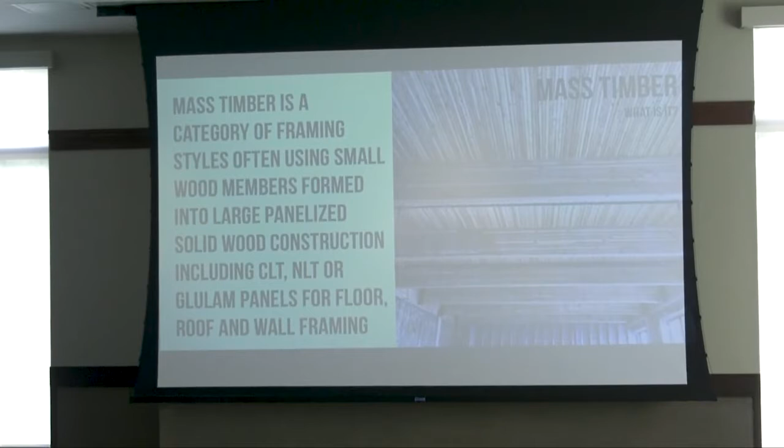They had solid timber columns that are maybe 10 by 10, 8 by 8, but those were cut from one single log. What mass timber construction does is allow us to create those similar sized large cross sections of wood, but instead of being cut from one log, it could be 8 individual 2 by 10s glued together or something like that. That's historically where timber construction has been.

Now, unless it's a specialized timber frame, where wood construction has moved into is this realm of light frame wood construction. That could be everything from single family homes up to 4 or 5 story apartment buildings, hotels, etc. What mass timber construction has allowed the construction industry to do is really bridge the gap between those two.

Now we can go back to the historic post and beam style construction, still using wood, but using mass timber. So it's panelized systems like this, where these are glue laminated timber beams that you see here. On top of that is a nail laminated timber floor deck, creating solid timber sections, panels, slabs essentially, that are completely timber construction.

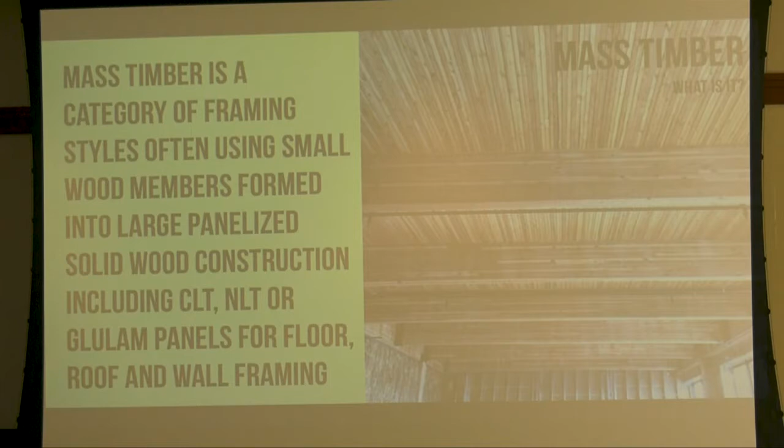I'm just going to go into an introduction of the 4 common styles of framing a mass timber building, and then we'll look at the specific products that go into that. The first, by far the most common style of modern mass timber framing, is post and beam style construction. This is a great example of that.

This is called the T3 building. It's in Minneapolis, Minnesota, a 7-story office building, spec office space. Amazon has office space in this building. It's 1 story of concrete and then 6 stories of timber construction, like you see this style of framing here - glue laminated timber columns, glue laminated timber beams, and on top of that a nail laminated timber deck, which I'll explain in just a second.

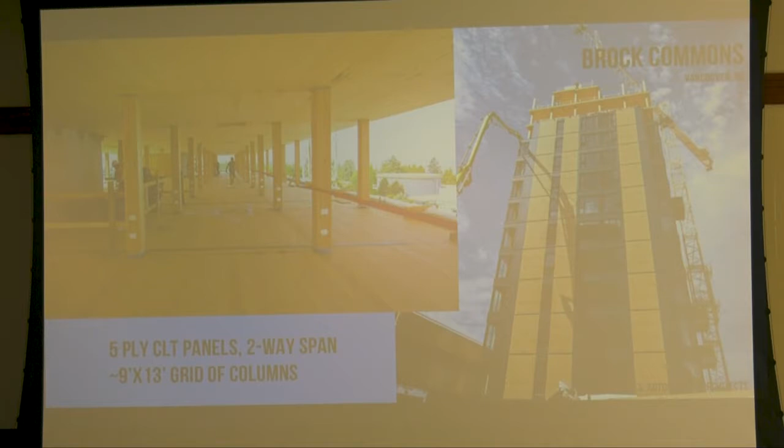The second option, certainly less common, but we're seeing much more interest in this style, is what's called two-way panel systems, or two-way span systems. This style is sometimes used in concrete construction, and the idea is that if you look down this aisle of columns, there's no beams - not a single beam on this entire project. All of these timber slabs or floor systems are point supported just at the column locations, so that timber floor is spanning in both directions, as opposed to the previous system where there was beam, beam, beam, and the slab was just spanning one direction from one beam to the next.

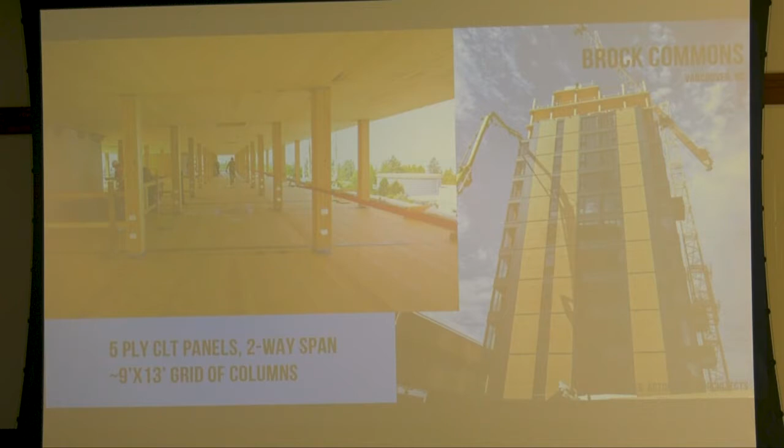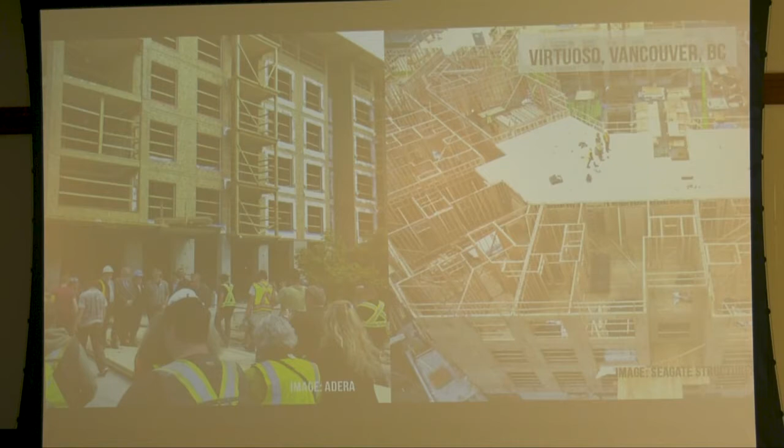The third option is really a hybrid approach mixing light frame wood construction and mass timber construction. This is a project up in British Columbia that from the outside looks like a traditional 4 or 5 story light frame apartment building. But what they've done here is keep those 2 by 6 vertical stud walls, while instead of a floor and roof system that's trusses or I-joists, they're using cross-laminated timber floor panels. So they get the aesthetic from below, exposing that timber panel, plus the benefit of speed of construction that cross-laminated timber allows, but the vertical systems are just as you'd see in any other light frame wood project.

The fourth style of framing, sometimes referred to as the honeycomb style, is basically mass timber bearing walls and mass timber horizontal surfaces. This is a 4-story hotel in Alabama, and it's all cross-laminated timber construction.

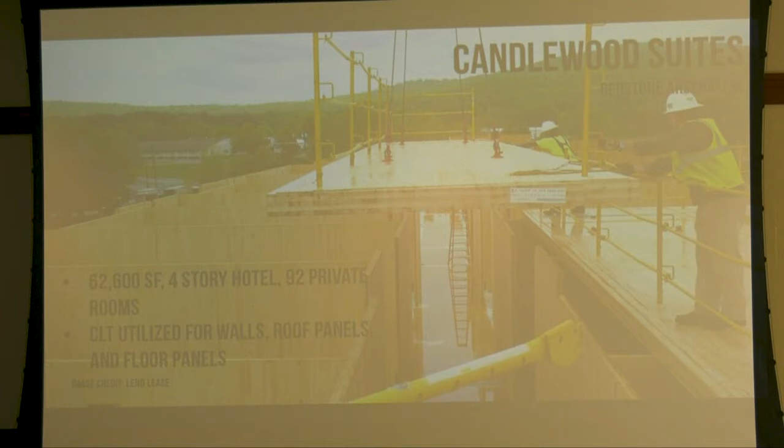So you can see this is looking down the corridor of what will eventually be this hotel. Bearing walls separate each of these individual hotel rooms, and they're lowering this section of cross-laminated timber floor panel that will be the walking surface over this corridor.

So that's the snapshot of the four styles or four ways that you can frame the skeleton of a mass timber building.

So what are the actual products that go into that building? The first one, I've alluded to this a few times, glue laminated timber, often called glulam. It's a product that's been used in construction for almost 100 years here in the U.S., very common especially in timber bridges, but it's seeing more of a renaissance as this mass timber revolution occurs in the U.S.

Simplistically, it's using mostly just 2x commodity lumber, and you place one on top of the next flatwise, a screen of adhesive between each. The entire section is pressed together and planed. So you end up with this solid cross-section of wood that could be 8 inches wide, 2 feet deep, but it's made up of a number of small individual laminations of wood.

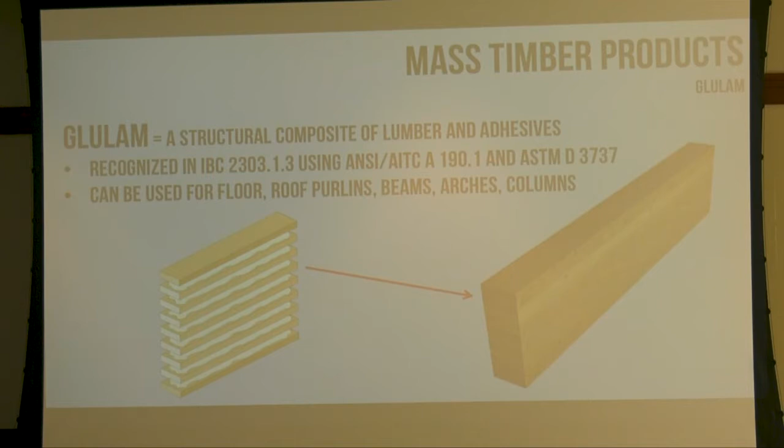One of the benefits is that you can vary the strengths of the laminations of wood based on where the structural stresses are highest. So if you think about a beam that's in bending, the top is in compression, the bottom's in tension, so you can place your higher strength laminations there and use lower grade lumber in between. You're really optimizing, whereas a solid 10 by 14 beam has the same strength properties throughout.

This style of post and beam construction with glue lam, oftentimes we're looking at projects like this, but I wanted to highlight that there is capability to use glue lam in much larger, flexible shape sizes of buildings.

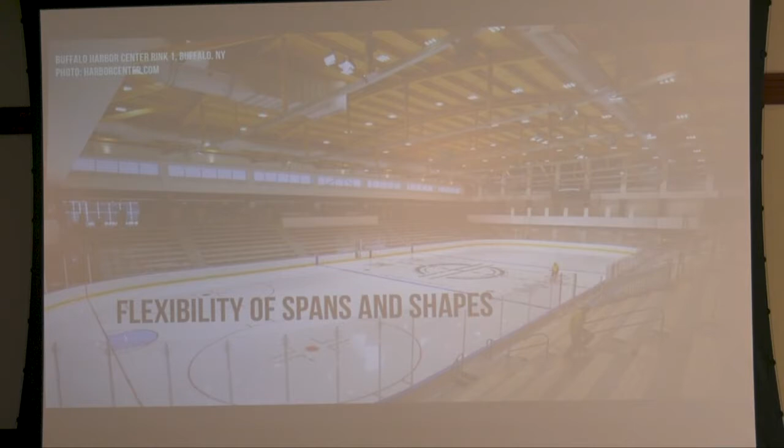And then the actual products that go into the horizontal surfaces. If we've thought of creating the structural skeleton of a building with beams and columns, now we need the horizontal surfaces, the floor surface and the roof surface. You can see there's a pretty wide variety of products that we can use to frame those systems.

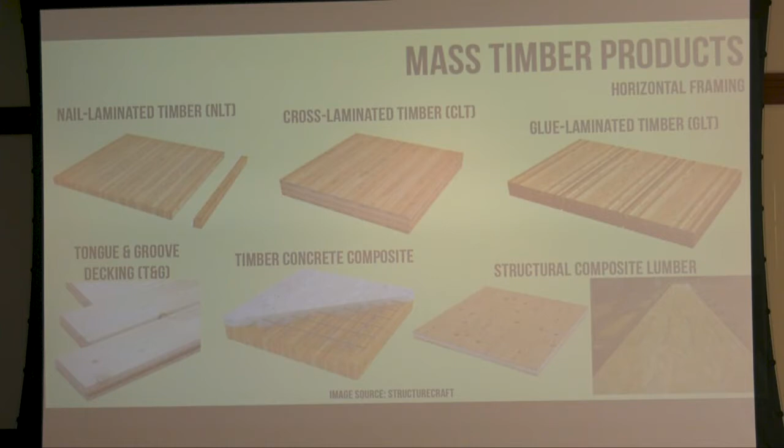We're going to focus mostly on the top three, those are the most common. I do have samples of cross-laminated timber and nail-laminated timber on the back table too. I meant to bring them up and pass them around, but feel free to put your hands on them and see what they feel like.

So the first one, nail-laminated timber. Again, you can see the common theme here, most of these products are made up of a number of individual smaller commodity lumber products. This is simply taking 2x lumber, 2x4, 2x6, 2x8, each oriented on edge, and then nailing one lamination to the adjacent lamination to form a solid timber panel.

Usually this is fabricated off-site, so you might have an off-site warehouse or fabrication facility, and a contractor or framer would be fabricating panels maybe 8 feet wide, 20 to 40 feet long, and those panels are erected on site. You can think of that as similar to precast concrete construction, where they're casting slabs off site and bringing them to erect, very similar with nail laminated timber.

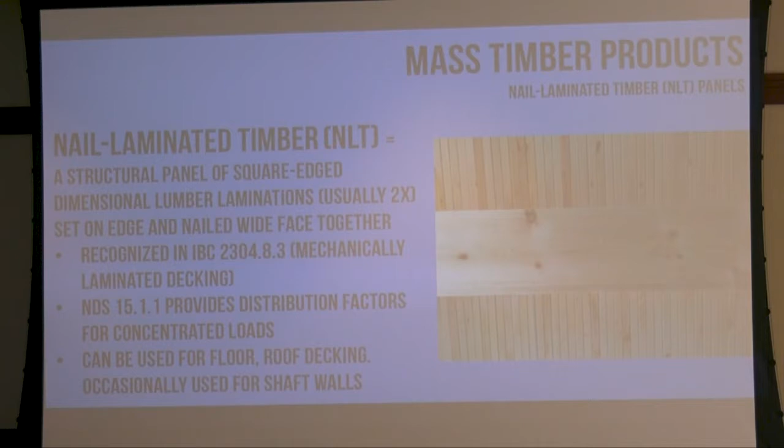Also, if anybody is doing any type of mass timber building design, there's a copy of this on the back table, feel free to grab it. It's a great resource, the nail laminated timber design and construction guide. You can also download this free on the web.

Just one example of a modern timber project that has used nail laminated timber, this is the Bullitt Center. It's a custom office building in Seattle, Washington, completed about 6 years ago. You can see looking down this open office space, a really beautiful structure, glue laminated timber columns and beams, and nail laminated timber for the floor surface and roof surface.

That's exposed from below, but it's usually not exposed from above. Typically on top of this surface you'll have some type of acoustical mat, because acoustics is a concern in these types of structures. Oftentimes you're pouring either a thin concrete topping layer or using a combination of other materials on top, which your floor finish is installed on, and those also help with acoustics. So the underside can be exposed, but the top is typically not.

Dowel laminated timber is very similar to nail laminated timber in terms of how it looks and goes together. The difference is that rather than using nails to attach one lamination to the next, we're using hardwood dowels, where you're drilling through the entire panel and inserting these hardwood dowels through to tie that panel together.

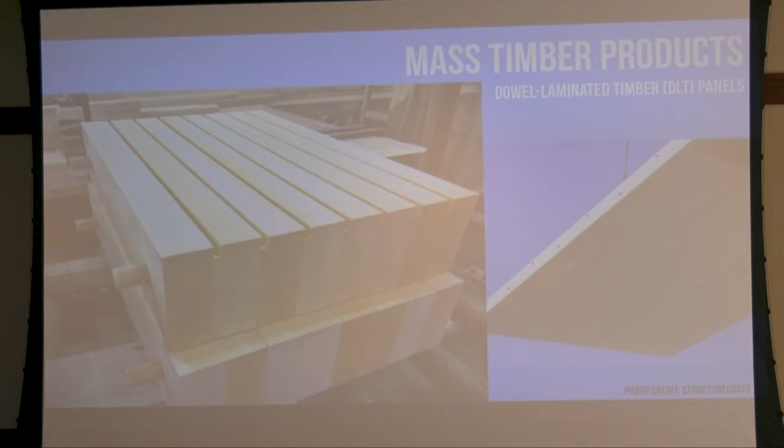And then glue laminated timber. We talked about glue lam in terms of a beam and column application, but some people are actually using this to form solid timber panel surfaces, where you're fabricating, usually 2-foot deep glue lams, but then you just lay them on their side and lay multiples of those beams side by side.

And then more of the traditional heavy timber construction is using tongue and groove decking. Everybody's probably familiar with this, 2x, 3x, or 4x are the most common.

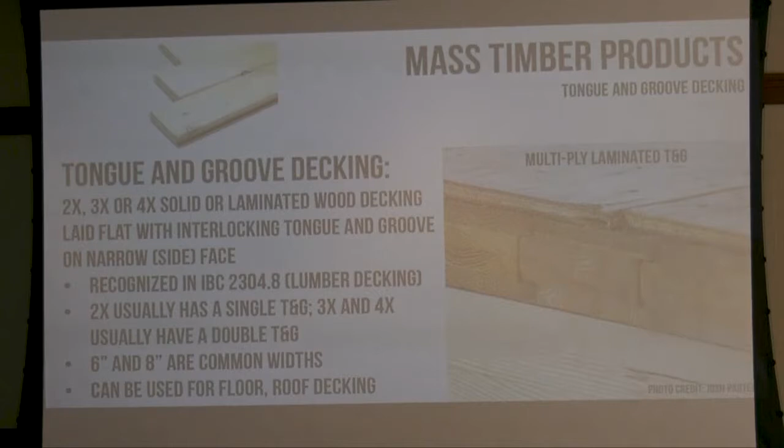One example of a very recent project here in the Northeast that used this approach is the Patrons Oxford Insurance Building, this insurance company's headquarters in Portland, Maine. This was completed just about a year ago. It's a two-story structure, about 20,000 square feet, and they used exposed timber, glue lam beams and columns, and then a tongue and groove decking system on top of that.

And then probably what some people consider the rock star of the modern mass timber movement is cross-laminated timber. So what is cross-laminated timber? It's a solid panelized timber system, and again, it's made up typically of 2x commodity lumber products.

But the difference between this and nail lam or dowel lam is that instead of each lamination being oriented vertically, each lamination is flat. So you basically lay one lamination side by side to the next. Maybe you have an 8-foot wide strip of 2x's, screen adhesive over that entire surface, and then another lamination of 2x's goes on top, but 90 degrees perpendicular to that previous layer. You keep doing that, alternating directions. You generally have an odd number of plies so that the two face plies are going the same direction.

It's very similar to how plywood is made, you have that same style of alternating directions. People have referred to CLT as plywood on steroids, right? Instead of a half-inch thick panel that's 4 feet by 8 feet, you have a 7-inch thick panel that's 8 feet by 60 feet. So those are the dimensional differences we're talking about.

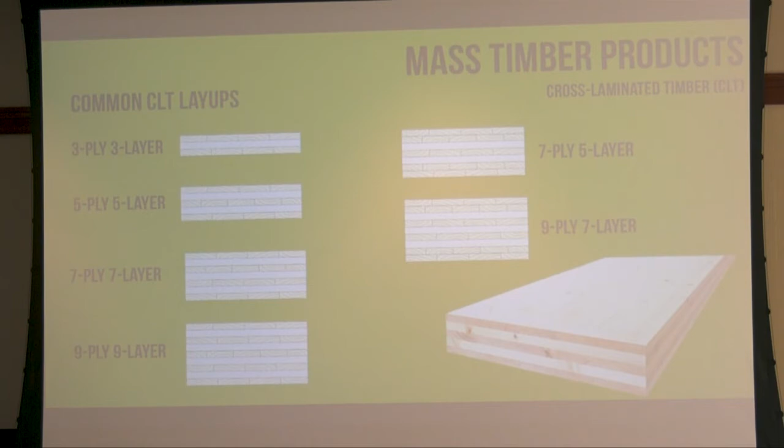So just to look at the end or cross section of a panel of CLT, this is what we're talking about. Just to give you some idea of scale, a 3-ply panel is about 4 1/8 inches thick, a 5-ply panel is about 6 7/8 inches thick, and a 7-ply panel is about 9 5/8 inches thick. Those are the three most common thicknesses in North America. Once you get above that, cost starts to become an issue.

One of the differences in terms of how we think about timber construction and modern mass timber construction is that it's a completely prefabricated style of framing. You're not going to your local lumber yard, purchasing a stockpile of CLT panels, having them delivered to the site, and then cutting each one to size. You're figuring out where on the project each panel goes.

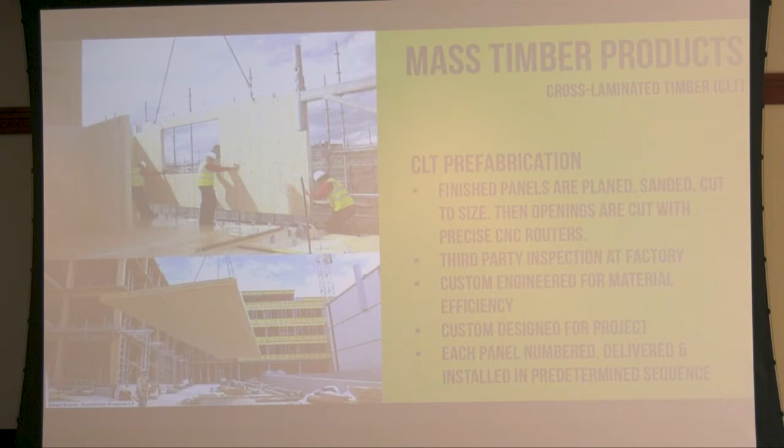This is completely done through a shop drawing process, generally speaking a 3D building model process, where every panel, every product is for a specific location, cut to size, even things like notches, holes, window and door openings. Everything is done prior to getting to the job site. Even how these panels are loaded sequentially on the truck is thought out ahead of time, so that when that truck arrives, it's pick and place, right?

You're not having to create a separate material stockpile on site. So it's a very quick installation process because of this pre-planning work that goes into it.

Just an example of a project, we saw this one previously. This is the 4-story hotel on a military base called Redstone Arsenal. Just as a point of local interest, this developer called Lend-Lease has since constructed a second one of these 4-story CLT hotels at Fort Drum in upstate New York. So we're starting to see more of these locally.

One of the interesting stories with this project is that this developer has a contract with the Army to develop over 50 of these hotels. They've traditionally always built them on military bases, and they've traditionally always built them with light gauge steel stud framing.

That first project, this one you see here, this company does international work, and they had used CLT in some of their international projects. They decided to give it a try in the U.S., and what they found was that because of the speed of construction, they were able to frame this about 30% faster than their traditional light gauge steel projects, using almost half the number of people on site to frame it.

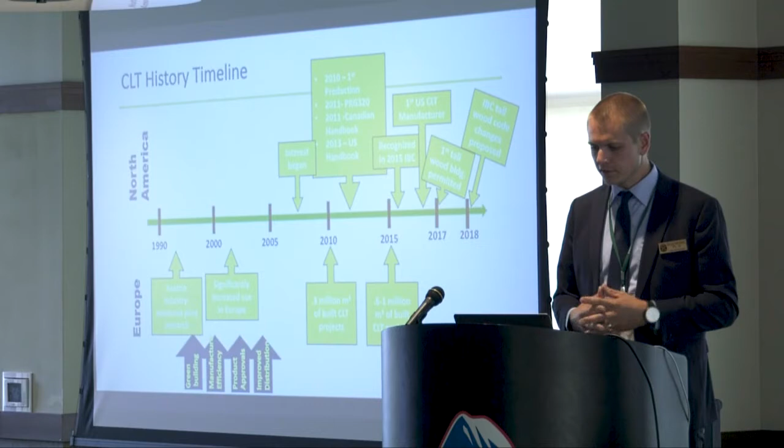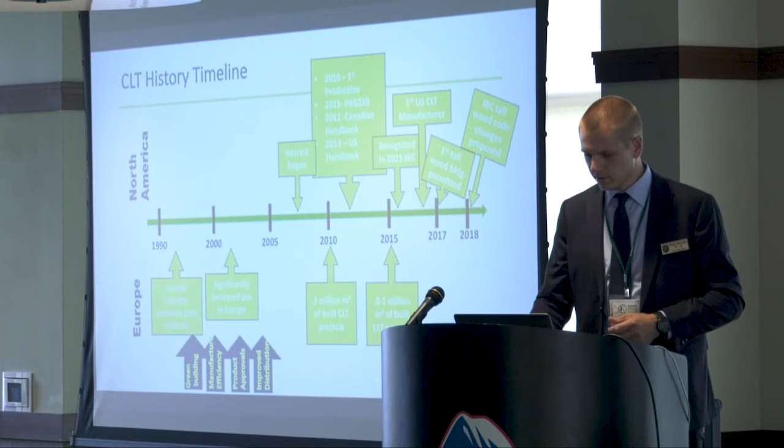We'll get into this at the very end here in just a couple minutes when we start looking at the next step. There's more interest in tall wood buildings, and the code is continually evolving to recognize that. The International Building Code comes out with a new version every 3 years. Right now the most current version is the 2018, but the changes for the 2021 Building Code are already in process. So I did mention the significance of CLT being in the 2015 Building Code and all versions since then.

One great resource to point people to is the Cross-Laminated Timber Handbook. This came out in 2013 and was really the first design publication to help people that are interested in designing buildings with cross-laminated timber. You can download this for free on the web as well.

Another question that we get very often is, I'm kind of interested in this mass timber thing, and again, we help engineers and architects all around the country, so is there anybody near me that's producing mass timber, in particular CLT? Glulam suppliers are fairly abundant, spread throughout most of the states. Regionally, the closest, largest one to us is in Unadilla, New York, a company called Unalam.

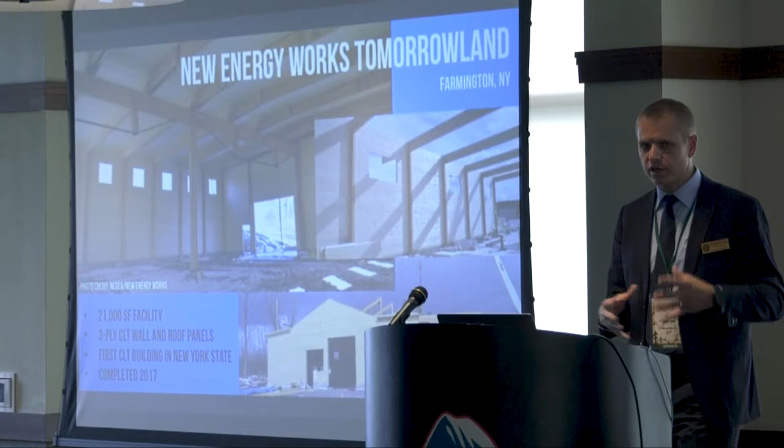In upstate New York, this is the fabrication shop for a timber framing company called New Energy Works. This is the first all-CLT building in the state of New York. It's about 20,000 square feet, and you can see they're using CLT for both the wall panels and the roof panels, and then glulam columns and beams.

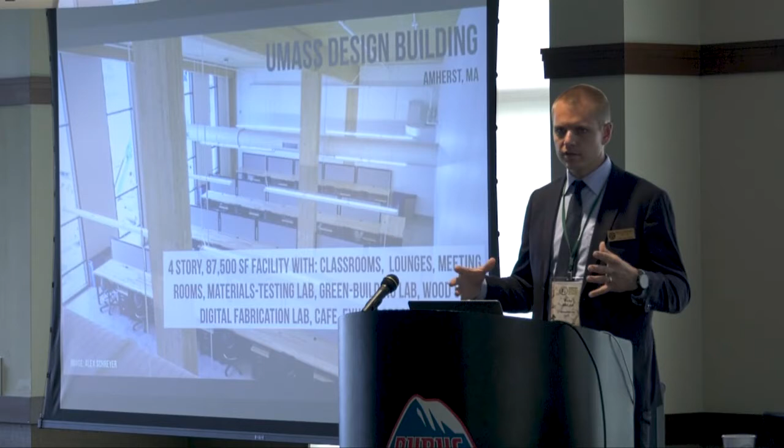And then really the game changer, as far as significance of project size and display of innovative mass timber products, is this 4-story building at the University of Massachusetts Amherst called the Design Building. This opened in early 2017, so it's been open for about 18 months now. It's really a unique and excellent display of the variety of mass timber products and systems that can go into construction.

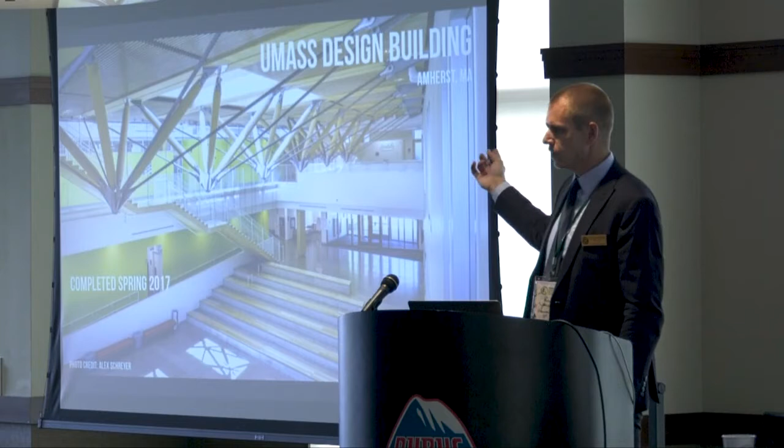There's lab space, classroom space, and also this really beautiful entry courtyard, interior courtyard area. On top of this, you can see there are skylights and actually a green roof area. One of the departments this building houses is landscape architecture, so they're using this building not only as housing for their classroom spaces, but also as a teaching tool by exposing the structure, exposing the mechanical systems, and using that green roof. Just some of the images of that project.

And then here in the state of Vermont, there's an interesting story behind this. This is actually under construction now - it's the new base lodge for Mount Snow in West Dover. I gave a mass timber presentation at an event probably about 18 months ago, and after that, one of the architects who attended contacted me about 2 months afterwards, saying, hey, I've got this new base lodge project I'm working on. It was planned to be all steel construction.

He said he really liked the presentation and was interested in using mass timber. So over the next month or so, I helped him work through a lot of the design questions, construction types, and fire ratings. Ultimately, the roof is now going to be exposed glulam. They didn't end up using CLT - they're actually just using a tongue and groove decking system. But I saw some photographs, and a lot of that timber has been installed, and the project's looking really beautiful. Just a local example of a great use of mass timber construction.

In closing here, over the next few minutes, I wanted to give a glimpse into what we see coming up next with mass timber construction. I'd say the future's looking up - there's a lot of interest in going taller, building taller wood buildings.

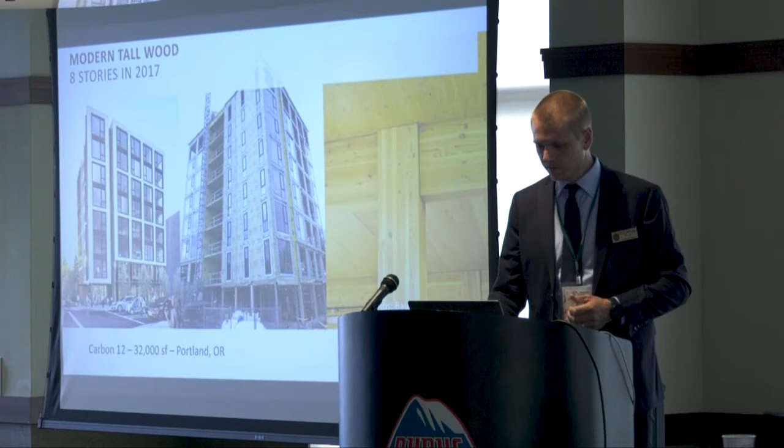And then the big one is the 12-story Framework project, which is scheduled to begin construction hopefully this year. This was the winner of a USDA tall wood building competition in 2015, where they solicited design teams to submit wood designs for buildings taller than 100 feet. This was the winner of that design competition, receiving $1.5 million of funding from the Softwood Lumber Board, USDA, and several other organizations to fund the research and additional design work required to bring a 12-story mass timber building to fruition. This building has received all of its required building permits and is hopefully going to start construction soon.

On the building code side of things, looking at tall mass timber buildings, the code did recognize this trend in interest in taller wood buildings. So in 2015, the International Code Council, the body that writes the International Building Code, started what they called an ad hoc committee on tall wood buildings. They tasked this committee to come up with a set of code change proposals that the committee and voting governors would vote on eventually, to allow taller wood buildings prescriptively in the building code.

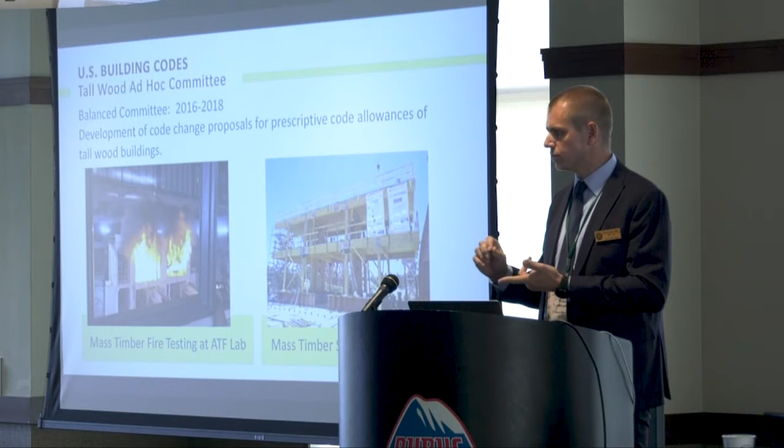Throughout the next 2.5 years or so, this tall wood committee required things like complete compartment fire testing, like you see on the left. This committee was composed of people from the wood industry, but also from steel, concrete, and fire service. Ultimately, the deadline for their submission was January of this year, about 6 months ago. They submitted their proposals to change the building code to allow taller wood buildings.

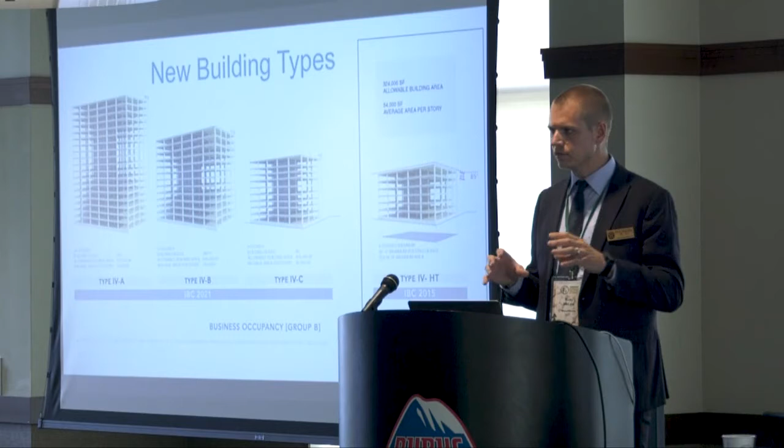The proposal included basically 3 different variations in tall wood buildings, the tallest allowing up to 18 stories of mass timber construction. The next step was in April of this year, about 2 months ago, when the first round of committee hearings took place, and the short story is that there was great support for these tall wood code change proposals.

The committee votes on this. It's a 14-member committee, and they basically vote whether it's recommended for approval or recommended for denial. All 14 submissions were recommended for approval, and with the exception of one, all were recommended unanimously for approval. The one that wasn't unanimous was 13 for and 1 against. So nearly unanimous suggestion for approval by the committee for these tall wood code changes.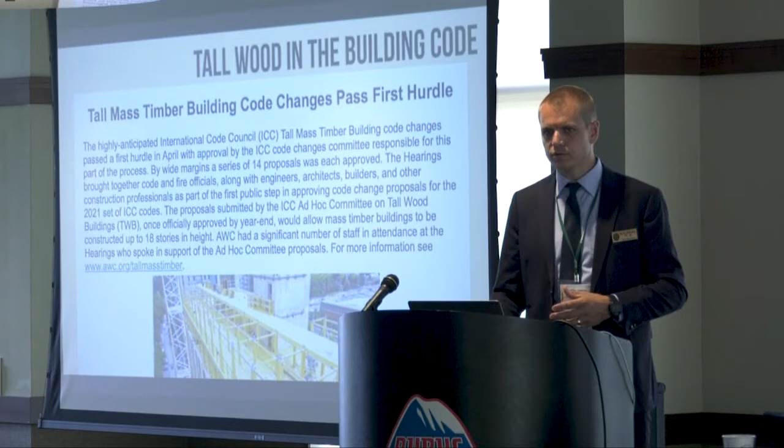The next step is October or November of this year, when the vote actually takes place. These are people with ICC memberships, typically building officials, plan reviewers, and people in governmental positions, who will vote on these code change proposals. If successful in the vote, starting with the 2021 building code, tall wood buildings would be prescriptively allowed, which would be a great step forward for expanded use of mass timber.

And then in closing, what does that mean here in Vermont? I realize Vermont, I live in the state, is not going to see 18-story mass timber buildings, right? So what does that actually mean for the state? Well, I think it can mean a couple of things.

I think there's much concern about, especially the young labor force, and creating interest in jobs more on the technological side of timber construction. As we see more of this modern mass timber construction taking place, there are more jobs around things like computer numeric control machines and creating 3D building models. It's a kind of shift in the technology side of timber construction.

Ultimately, what we're trying to do is grow the labor force and grow a market for continued use of forest products. So some of the statistics here are interesting. Over 700,000 jobs, direct and indirect, currently exist because of the harvesting and manufacturing of softwood lumber products. One of our primary roles is to see that number increase and also see the use of locally harvested forest products increase, and one of those venues could be through the use of mass timber construction in buildings.

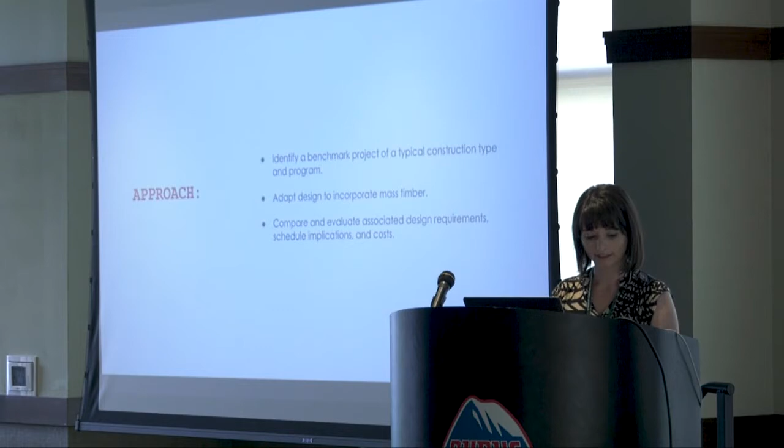Our approach was first to identify what I'm calling a benchmark project, and then to adapt that project to incorporate mass timber, and then to use that to compare and evaluate the design requirements, the schedule, and the cost implications. Our main criteria for choosing the benchmark project was that we wanted it to be something fairly typical for Vermont - a common building type, size, and program - and something where the lessons we learned could be used again and repeated. So we didn't want to choose a project that would be a one-off showcase project.

Once we chose that benchmark project, we reviewed the building codes, the energy concerns, acoustic requirements, structural requirements, and best practices, and then with the help of our advisory committee, adapted our design to mass timber. The goal was to basically change the structure from steel and concrete to mass timber, and then only change other components of the design as necessary to use mass timber, keeping it as close to an apples-to-apples comparison as possible. We didn't change the brick masonry veneer on the outside, and we didn't change the finished floor - only the things that had to do with the structure.

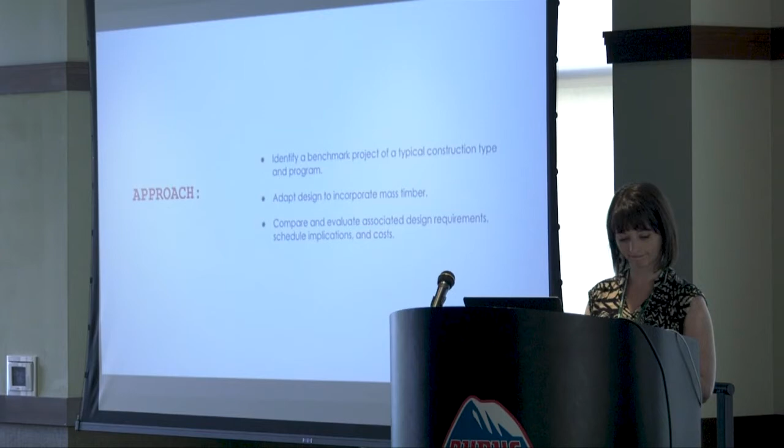And then once we had an understanding of all those requirements, we sent it to a cost estimator, got those results back, and compared them.

We looked at glulam, CLT, NLT, DLT, and tried to choose what was the best system for this project. This is a short description of the benchmark project we chose. It was called 29 Flat Street, which has since been renamed the Snow Block. So if I slip up, it's still in the design process. 29 Flat Street is a project that came to Stevens & Associates about last summer.

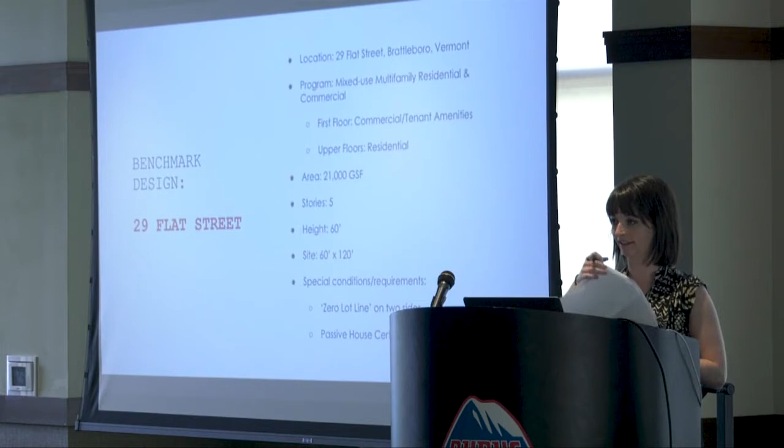We're designing it for the Windham and Windsor Housing Trust, and we completed the conceptual design last fall. That was the set of drawings and the level of design that we were comparing, or that we adapted to the mass timber design.

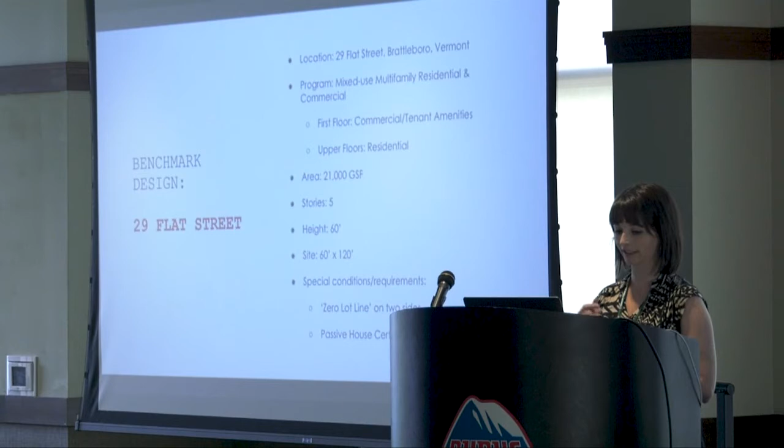The project is located right in downtown Brattleboro. It's a mixed-use, multifamily and commercial building. It's got rental space on the first floor, and then 23 residential apartments above. It's about 60 feet tall, 5 stories, and 21,000 square feet.

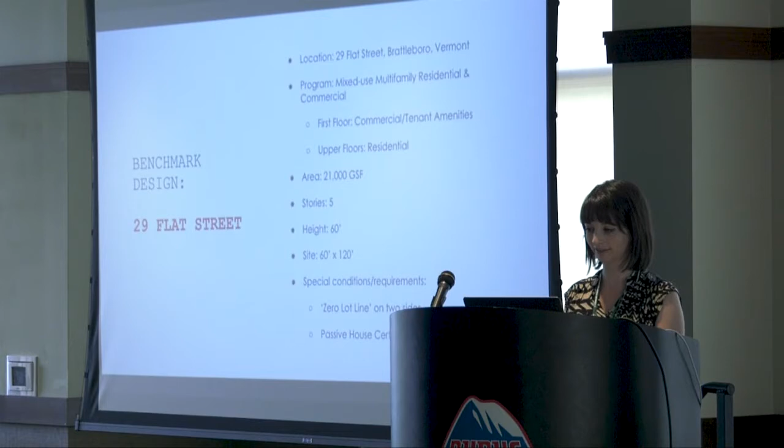The site was a special constraint because it's only 60 feet wide, and our building is 60 feet wide. Because it's downtown, we have what's called a zero lot line condition on both the east and the west. So we're built right up against the building on the east, and there happens to be a vacant lot to the west that you can see here.

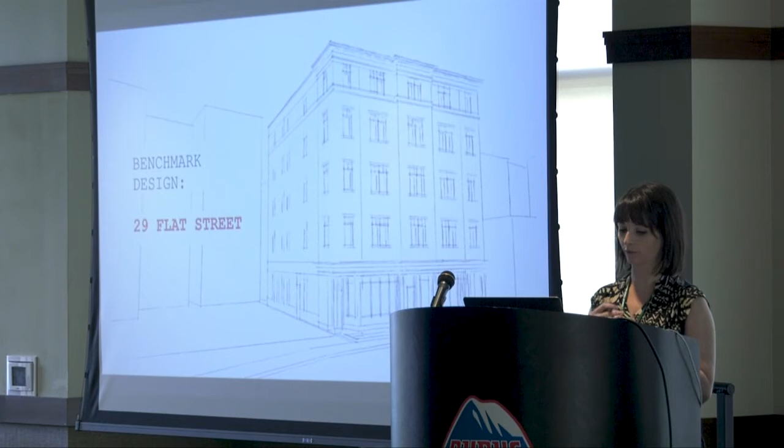We also had special energy requirements. The Housing Trust wants to meet Passive House certification with this project. So when we went through the original design process for the benchmark project, our conceptual design, we made certain assumptions regarding the R value of the wall and the insulation in anticipation of that.

So you're going to see that both our benchmark design and the mass timber adaptation have a double stud wall, and it was for the purpose of apples to apples. It was in the benchmark, so we wanted to keep it in the mass timber design.

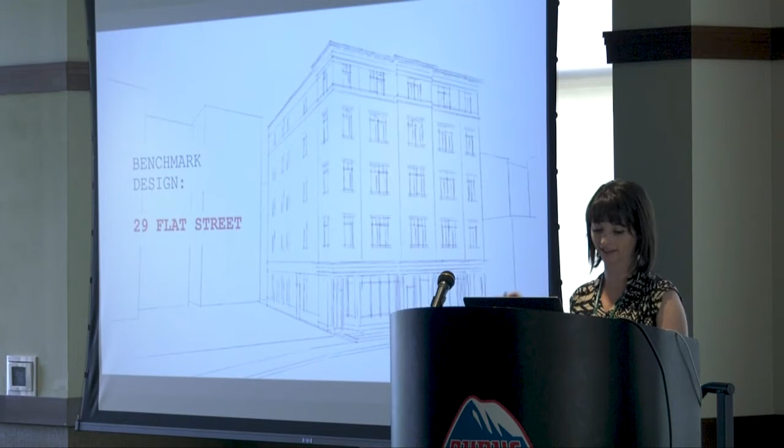This is an image of the project from Flat Street. You can see the empty lot to the west, but besides that, it's in a pretty dense area in downtown Brattleboro.

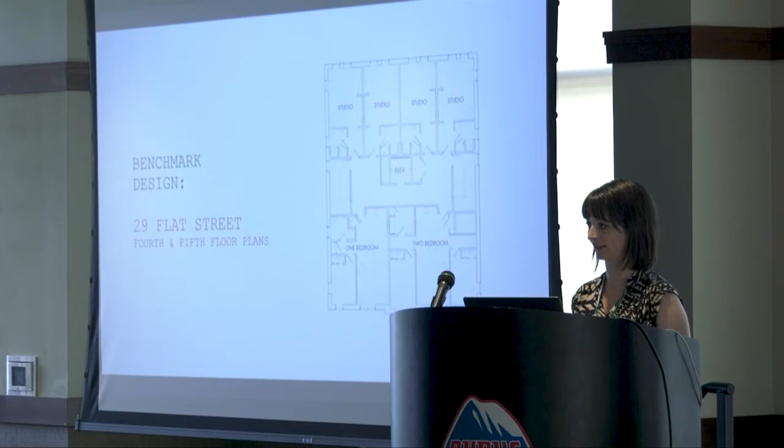The fourth and fifth floors were pretty similar, again a mix of studio, 1-bedroom and 2-bedroom apartments on a double loaded corridor. So we had almost a stacked plan, but not quite, which was a bit of a challenge when we were adapting it to mass timber.

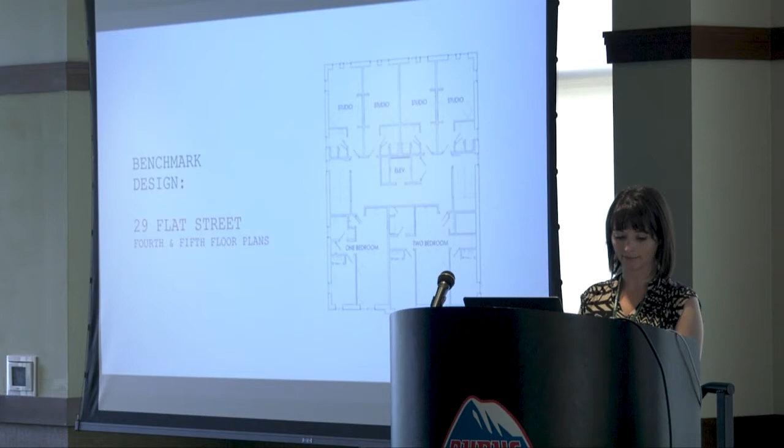Before I go on, all of the aspects of the project that I've described so far - the program, the configuration, the location, the energy goals - those are all things that we considered control factors when going into the redesign. So those are all things that we did not change. What we did change are related to the construction assemblies.

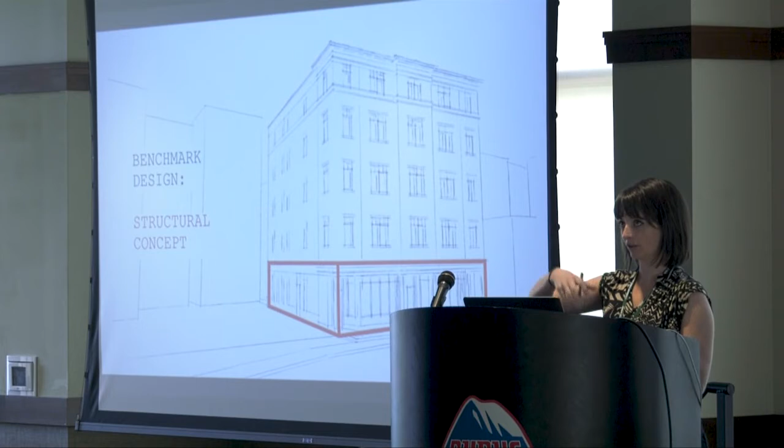So the benchmark project was designed as a podium-style building. It's podium plus 4, which basically means we have a steel and concrete base that is non-combustible, type 1A, and then the upper 4 floors are all a combustible material. They're made out of light frame wood, and those are combustible. Because of the site constraints and the program requirements to accommodate the size of program that we had, we thought the most economical way to get tall enough was to have that concrete and steel base.

And then we had a pretty simple bearing wall system, bearing walls on the front, the back, and the core of the building, with the floor deck spanning between.

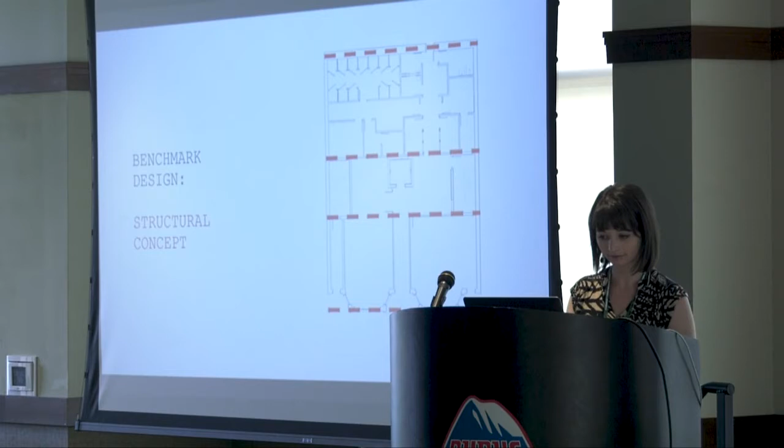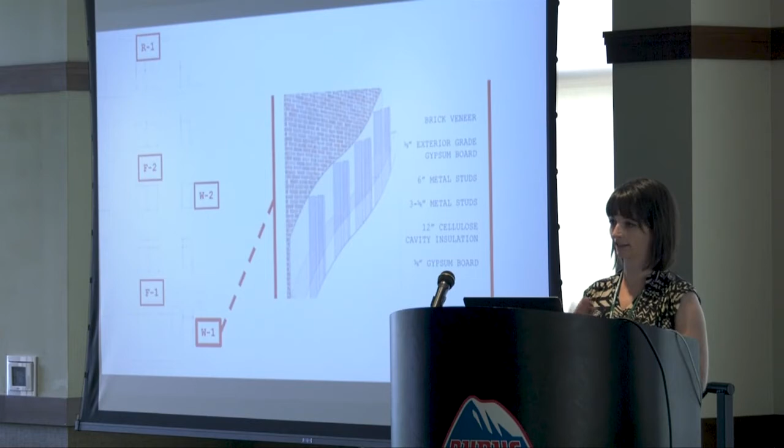So the wall assembly at the podium level uses light gauge metal stud framing. You can see here that there is a double stud wall, and again that was to incorporate the amount of insulation we thought we would need for the Passive House certification. The metal stud walls were so that this was a non-combustible system. I'm also showing the brick-based masonry veneer, but that's consistent throughout the project - we didn't change the exterior look of the building.

This is the wall system for the upper 4 floors. Same double stud wall, but here it's made of, I believe, 2x6s and 2x4s, so typical wood frame construction.

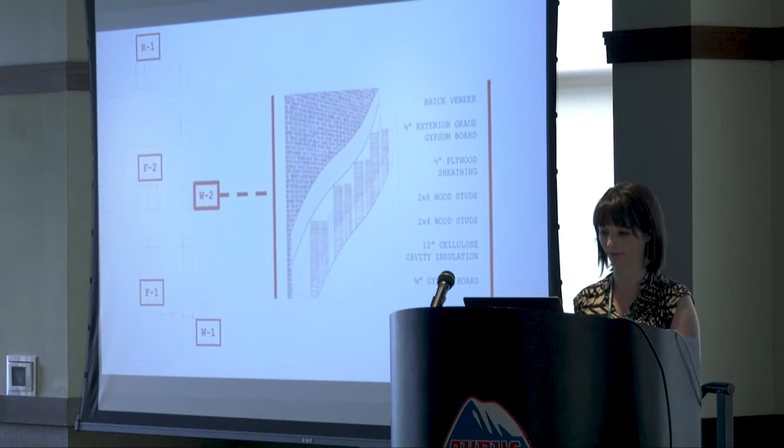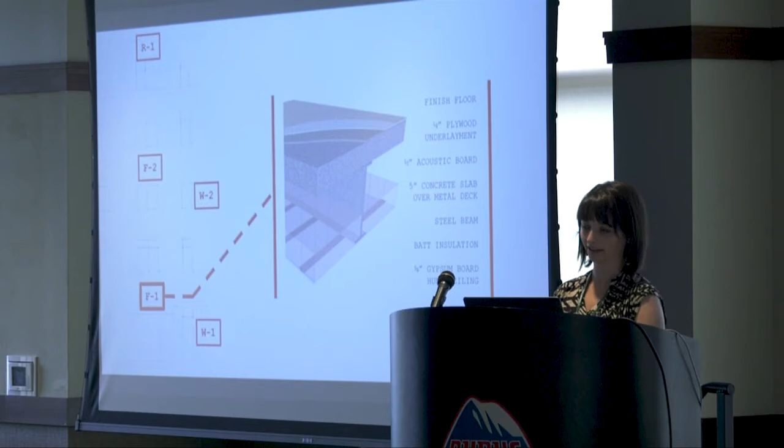All of the upper floors consisted of open wood trusses with a gypsum board ceiling below and the same finished floor above. The roof system is pretty similar, with open wood trusses and tapered insulation, all of the insulation tapered on the exterior.

So now on to the mass timber redesign. The major considerations that guided this were the exterior fire ratings, the acoustic ratings in the floors, and coordination of mechanical systems. Every choice we made when redesigning the floor, roof, and wall assemblies was made with these things in mind, so that the final product would function the same way as the benchmark did, just in case the owner chose to go in this direction.

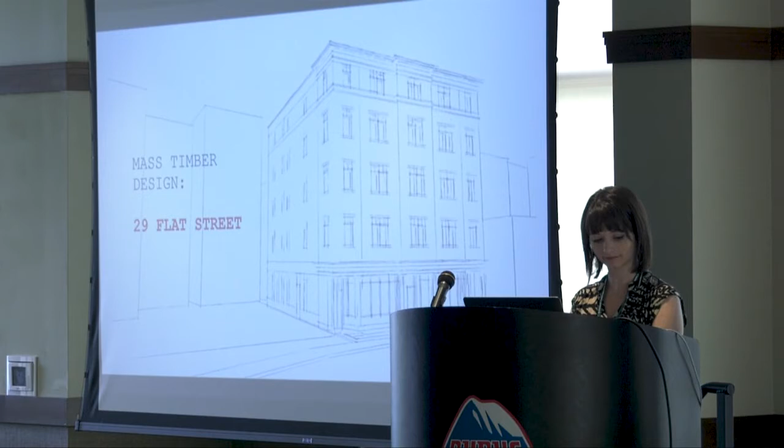For this redesign, we decided to go with a glulam post and beam structure spanned with 2 different types of timber decking, similar to what Ricky was talking about with the T3 building.

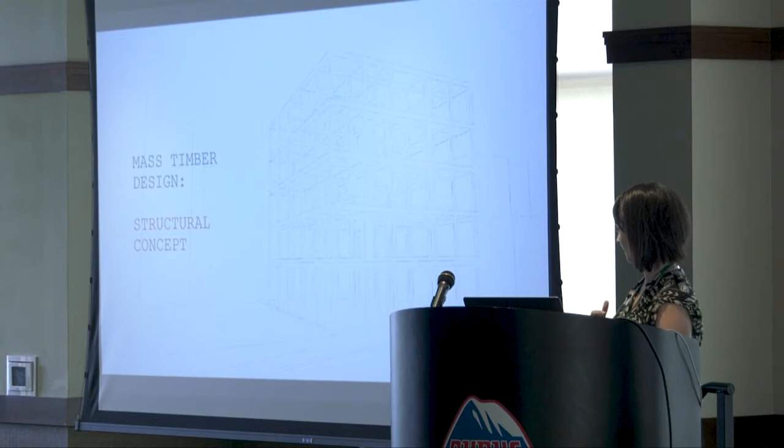Our exterior wall system was a 1-hour non-bearing system. We used fire retardant treated light frame wood that wrapped the post and beam structure. This was a Type 3B building, meaning the exterior walls need to be built of non-combustible materials, but fire retardant treated wood is included in that definition. On the inside, we have a second wood stud furring wall, again for this double stud wall and the amount of insulation. You can see the glulam post in this image.

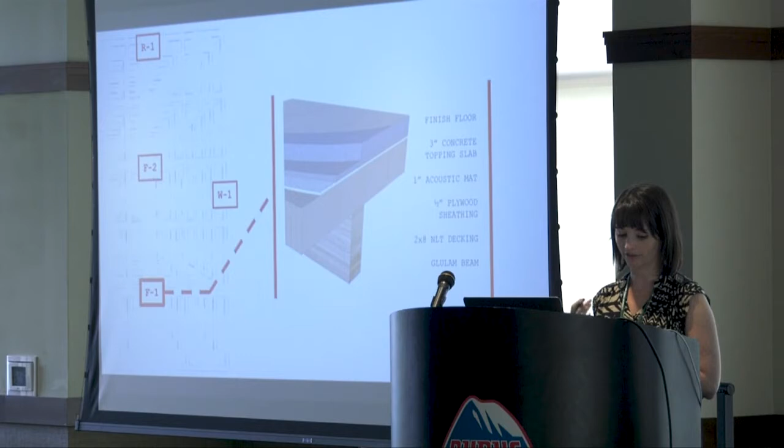At the second floor framing level, we used an NLT decking system over the glulam beams, and we were able to expose that to the first floor spaces below. So in all of those common spaces, you'd be able to see that beautiful NLT above. We thought that was really important to include. Above that, because acoustic concerns were really important to this particular owner, the Housing Trust, we have sheathing, an acoustic mat, and 3 inches of concrete above.

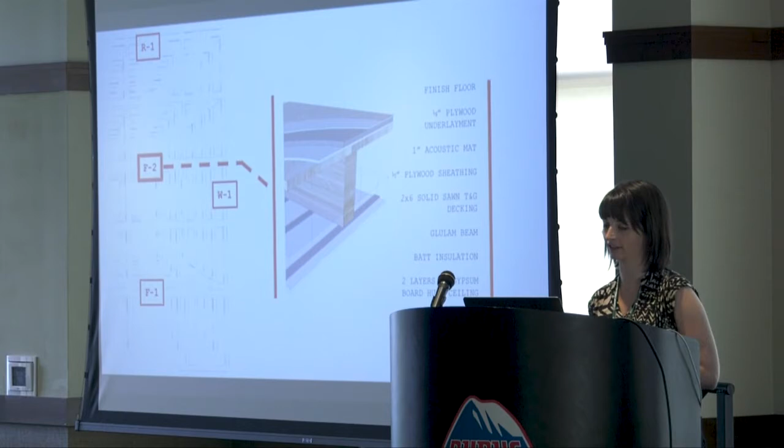On the upper floors, we had much shorter spans because of the layout of the apartments, so we switched from NLT to tongue and groove decking, about 2x6 tongue and groove decking. Here we have a drop ceiling, which I'll talk about more later. For this owner, we needed to conceal all of the mechanical equipment, and again the acoustic concerns meant we were dropping this hung ceiling. So unfortunately, on the upper floors, we were not able to see the underside of that timber decking.

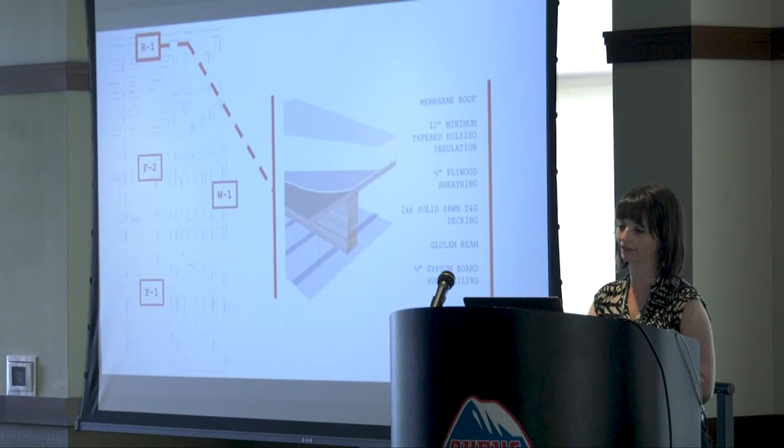And finally, the roof is the same solid sawn decking with the tapered insulation above.

Part of this project was to identify what, if any, regional sources there are for mass timber in the Northeast. Ricky's already shown a map, but here's one again showing what was close to us. While there are a lot of glulam manufacturers around the country, and there's Unadilla in New York, there aren't as many CLT or NLT manufacturers close by, although it's exciting that we now have two proposed for Maine. At the time we were designing this, though, that wasn't true, or we didn't know about it yet.

So we chose to incorporate NLT decking, in part because it was possible to fabricate on site or to prefabricate locally off-site. And obviously solid sawn decking is something that was available around here. So those were considerations when we were trying to choose which mass timber system to go with for this project.

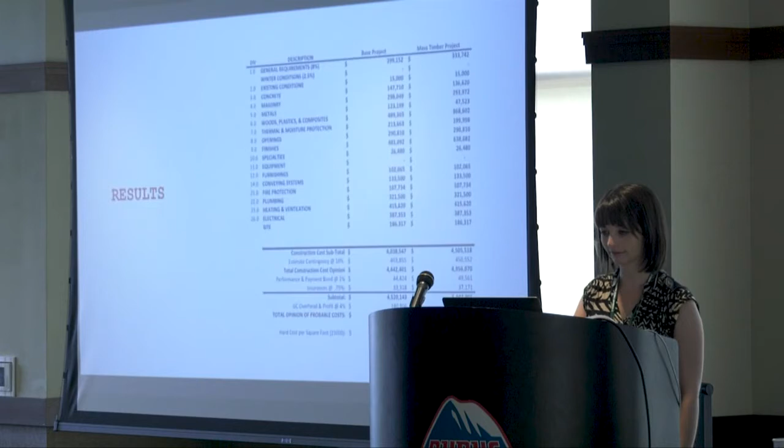Once we completed the drawings, we sent them to a professional cost estimator, the same one that had estimated the drawings for the benchmark project. I've included a summary of the results here. Unfortunately, but not unexpectedly, the total cost of the mass timber design was about 10% higher than the benchmark design. There's a couple different reasons for this, but it's not a huge gap, though it certainly is a gap if you're looking at hard costs only.

The major differences in cost were generally isolated to a few different divisions: metals, wood, finishes, and general conditions. The cost differences in other divisions were fairly negligible, so I'm not going to talk about them here.

The decrease in metals was obviously due to the elimination of that non-combustible podium on the first floor. So when we got rid of the podium, we got rid of all of the light gauge metal exterior walls and partition walls on the inside, and that metal deck at the second floor framing level.

However, when we got rid of that, we replaced it all with light frame wood framing, so consequently there was a pretty big jump in the wood division. That number is quite a bit higher because we removed the open web wood trusses, but replaced them with solid sawn decking and NLT decking. We still had plywood sheathing for diaphragm purposes and for acoustic purposes, and then we added back all of those stick frame walls.

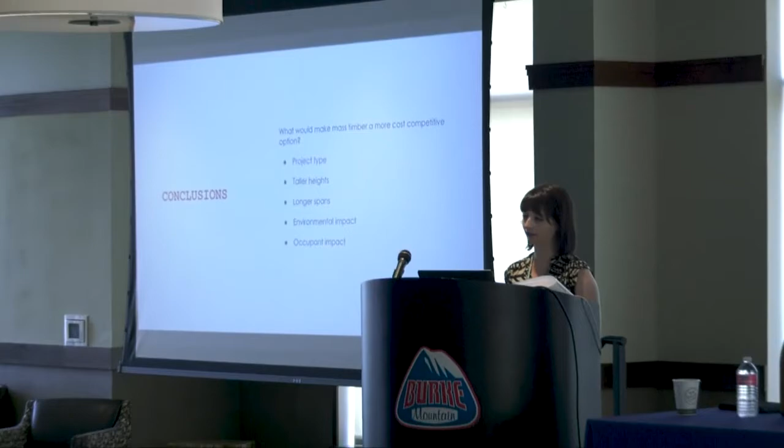There are also qualitative benefits of mass timber that add value for both the owner and occupants, even though they don't show up in the cost comparison. Wood has much lower embodied energy and reduces the carbon footprint through carbon sequestration. Humans are instinctively attracted to natural wood, so a mass timber building can have a positive impact on occupant health and well-being. Those are both added value to an owner that might decide to go with a mass timber building.

So the end product is that we did not proceed with mass timber for the 29 Flat Street building. However, we did decide to eliminate the podium, and continued with a 5-story wood-framed building, type 3B. So that was an improvement.

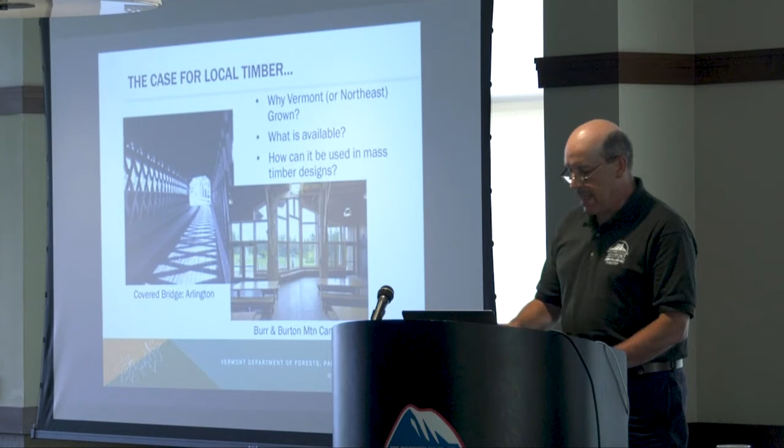For those who aren't foresters in the audience, we have about 4.5 million acres of timberland in the state, somewhere between 75 and 80% forested. Timberland is essentially defined as land that's available and capable of growing a crop of timber on it. On that land, we're growing about two times as much wood annually as we're harvesting or as is dying.

As mentioned this morning, I think Katie mentioned, overall on a nationwide basis we're actually going into negative growth numbers. But that's definitely not the case in Vermont, and we have an opportunity to utilize more wood in new uses and still have a very sustainable system.

Of that 4.5 million acres, about 80% is privately owned. One of the things we're really concerned with, mentioned again this morning with respect to the current use program, is that we have 87,000 landowners in the state paying taxes on this land, a constant output of cash to maintain it and keep it in forestry. So anything we can do to ensure periodic income from that property, so landowners are at least in part compensated for keeping that land open and forested, is a good thing as far as we're concerned. So what is it that we do have available?

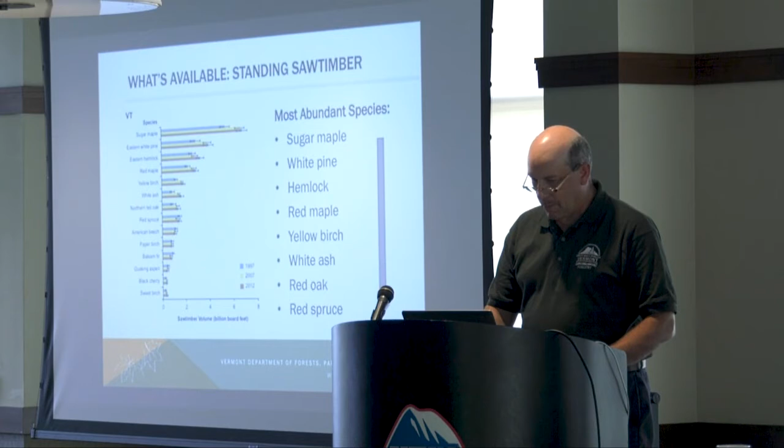A lot of that's a result of the fact that there are a large number of hardwood and softwood mills between the Canadian border and the St. Lawrence River. So there's a number of mills just over the border in Canada that we ship a lot of wood to.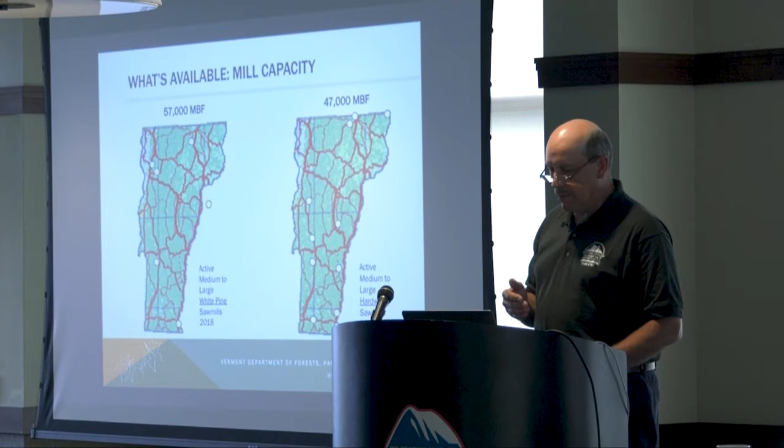Going back to spruce fir - we have capacity for milling white pine, capacity for milling hardwood, and a certain amount of capacity for milling spruce and fir, but it's really in small local sawmills where that material is used for framing lumber. Oftentimes it's sold green, primarily for local uses, generally not structurally graded material.

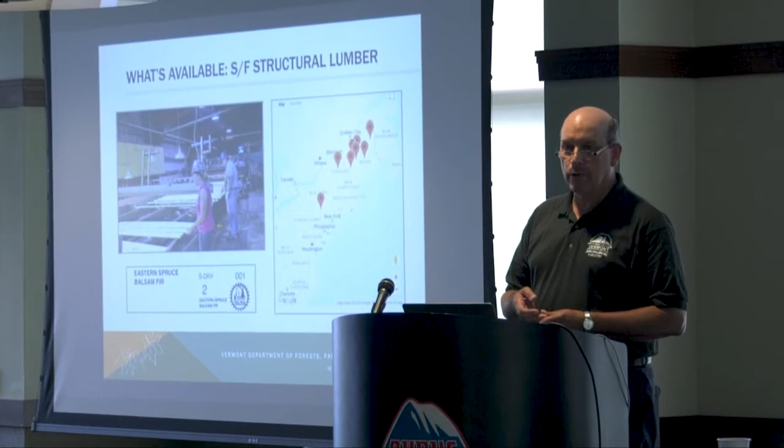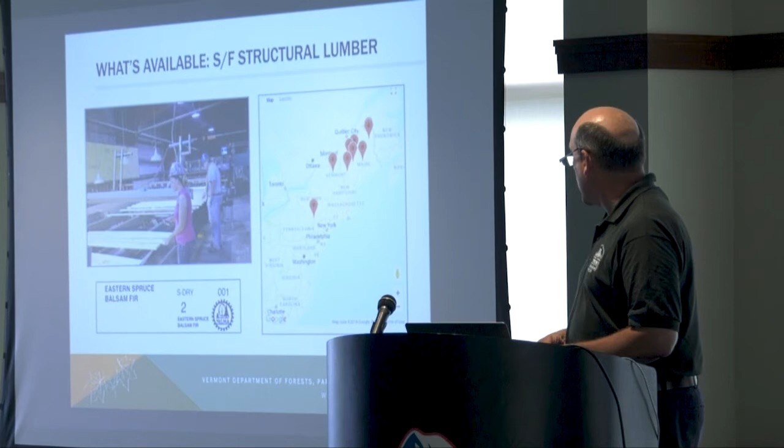The map on the right shows you where structurally graded material is being produced in New England and the Northeast - primarily Maine and Quebec. There's one mill in northern Vermont, Sear Lumber in Milton, that can do some hemlock grading, but they do very, very little of it. And a mill in Milan, New Hampshire that also produces structurally graded spruce lumber.

So we don't have the capacity in the state to really process spruce fir. We don't really have an opportunity to put out that structurally graded material. That limits the uses, or limits a big piece of what goes into CLT and some of the other mass timber products, because structurally graded material is needed to make those products.

So we may not be producing the wall panels or floor panels for those applications, but there are some other applications where we could use some of our native material - in non-structural applications.

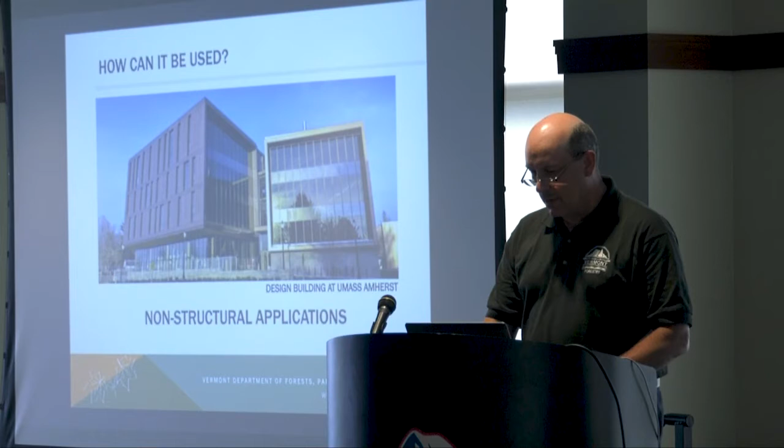Jillian pointed out a number of places in the building they were considering in Brattleboro where there were opportunities for using non-structurally graded material as part of that whole system. Ricky mentioned the UMass design building and the fact that it's really a hybrid system - some CLT and mass timber components, but other components of other systems.

And this is an example of that - this is non-structural wood being used to cover some of the structural steel components. There were steel I-beams used in this building that they basically covered with wood to make them look more appealing, and that material doesn't have to be structurally graded.

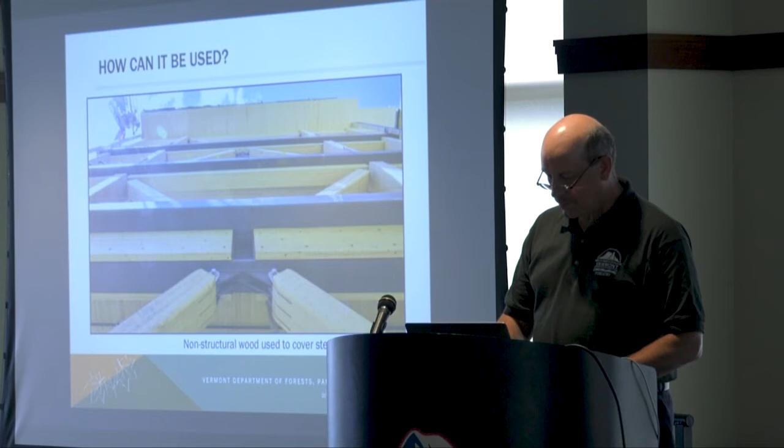The drop ceiling gives you the opportunity to cover up those mechanical, electrical, and plumbing systems that you may not want to see in the building.

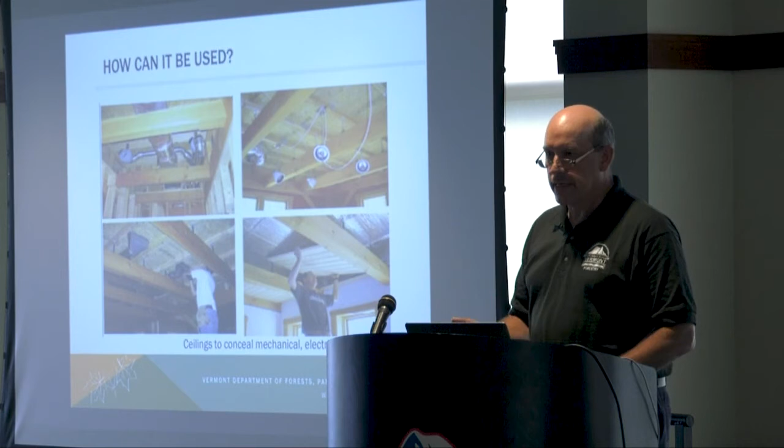I threw in another slide that just showed some different species, different grades being used as ceiling material. These aren't necessarily in mass timber buildings, but it gives you a sense for the variety of effects you could get by using different species or different grades of lumber in those non-structural applications.

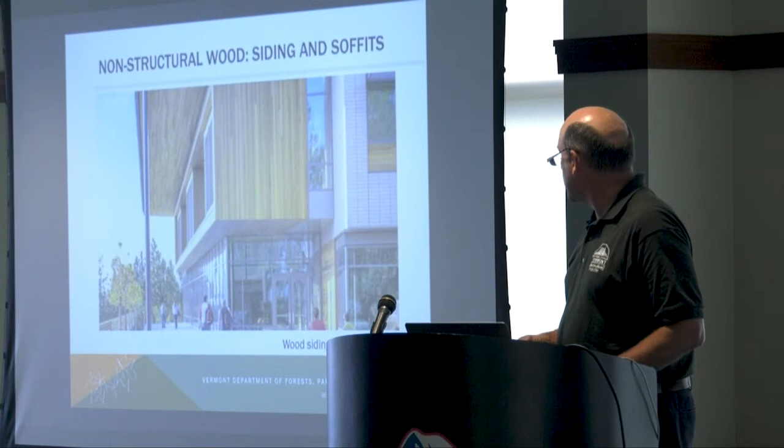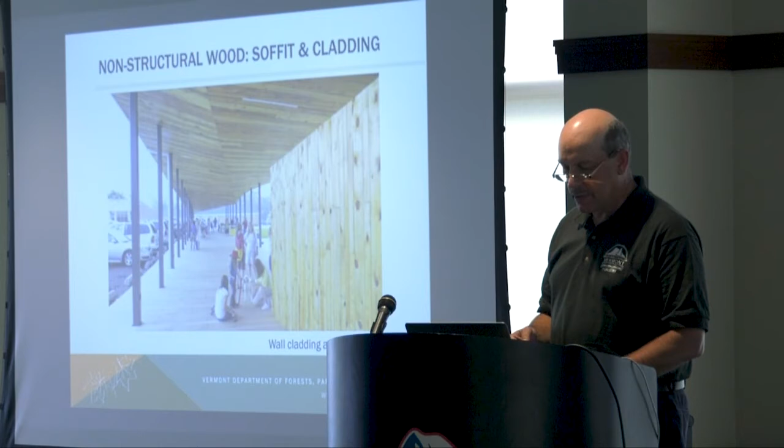A couple other examples: this is a community college building in Oregon, using non-structural wood as soffits and siding in this application. And another fairly similar application, this is a farmer's market in Virginia, again using non-structural wood in the soffits and in the cladding on the walls.

And then finally, Jillian mentioned some of the hybrid floor systems that utilize mass timber and concrete. You don't necessarily have to make the concrete the walking surface in those applications. There could be a possibility of using wood flooring in some of those buildings as well.

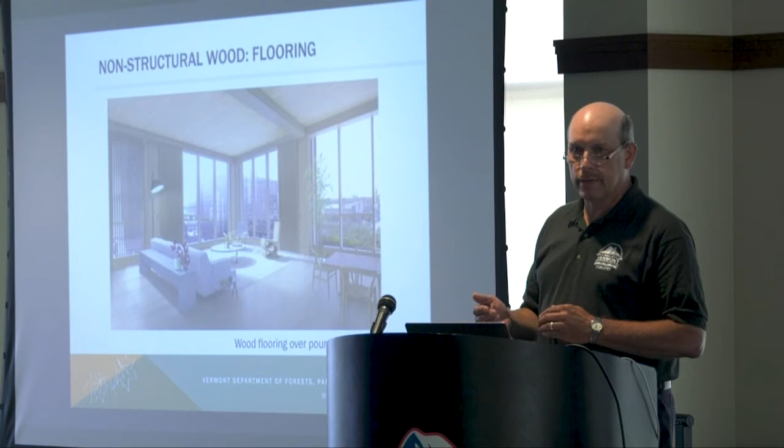So just a couple things to keep in mind, and then we'll wrap it up and take questions of the panel, I guess. Look for the opportunities to utilize those local species in non-structural applications in these buildings.

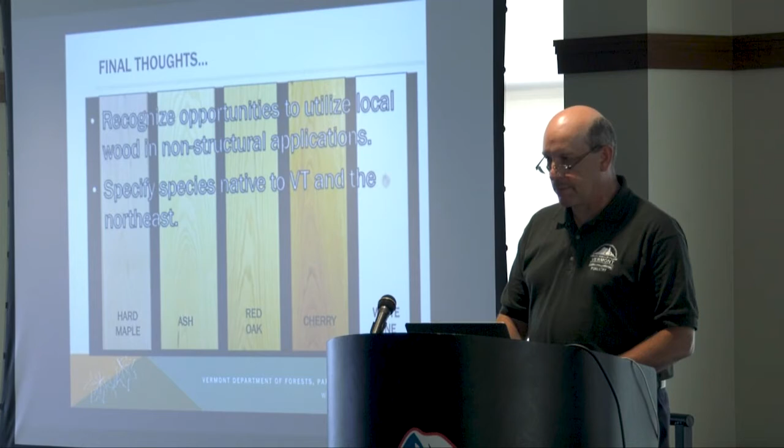If you're specifying, it's important to specify species that are at least native to Vermont or the Northeast. Oftentimes we see buildings, and we had an example of that in state government, where a new building built in Waterbury after the flood during Irene was specced with a lot of wood, but it was all specced with yellow poplar, which you can probably find in Massachusetts, but certainly not in northern New England. It's just a matter of making folks aware of what's available, what it looks like, and how our native species can be used.

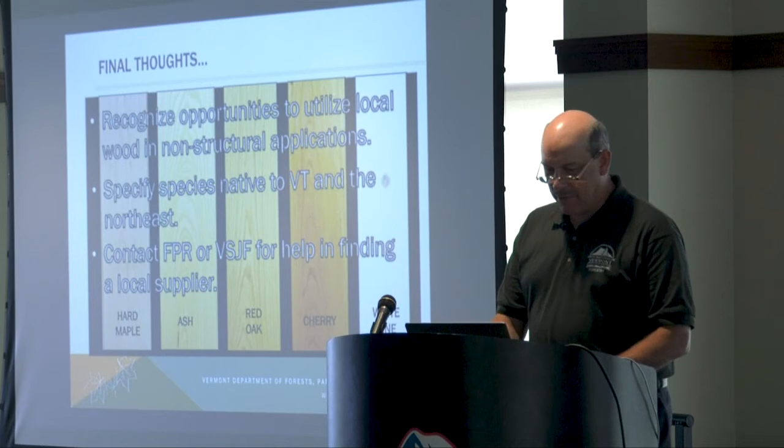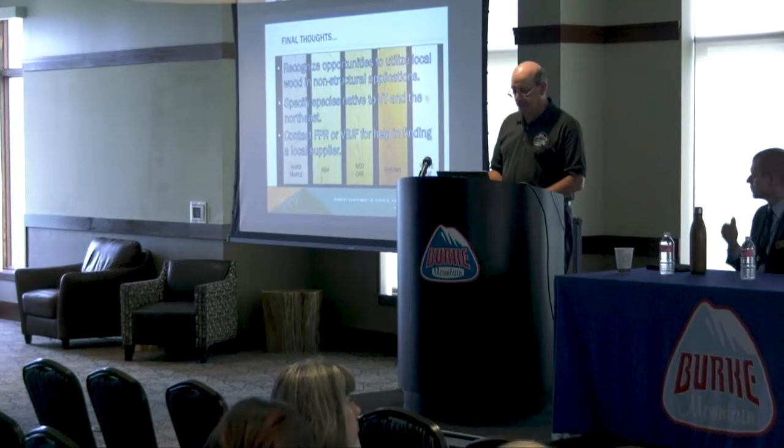And then finally, if folks need additional information or help finding suppliers, I'm available. Christine McGowan does a lot of this work with individual companies, and we'd be happy to help folks find suppliers and investigate species that might work for their projects. So, thank you.

We've got about 20 minutes for questions. I guess the first one would be: of that cost for the CLT that you had in the estimate, how much of that was shipping?

I can't tell you exactly how much of it was for shipping, but I can tell you that our cost estimator spec'd a product out of Canada, out of the Northwest. I think it's Structurlam, out of Western Canada. So we don't really know how bad that price was, it could have been considerably lower. Off the top of my head, I don't know, but a lot of it was shipping, and that's because currently there wasn't a closer place to get it from.

I'm thinking you're not going to have to preach much longer to the choir out here about using wood for this. I think what we want to know is, when can we get a CLT plant in Vermont? Is there a primer on what acreage, utilities, a typical CLT plant builder would want to see for a CLT plant in Vermont, so that maybe there could be some marketing by people like NVDA to attract somebody up here to the Northeast Kingdom, or somewhere in Vermont? Because if we're producing this stuff here, New York City's not that far, as is Boston, and we've got the wood.